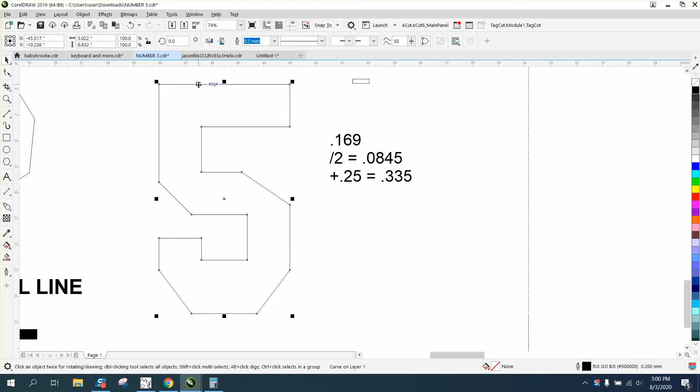and contour it .335 to the inside. That's where our tabs need to be. I would go ahead and go to there and break contour apart. We're going to need that later.

So we've got our tab, and that's going to stick to the midpoint. Now you've got your offset, duplicate offset set on, you've got it in millimeters. I've changed mine to inches, because I want that right on top of that. And then depending on how many you wanted in here, this is what's kind of neat about doing this.

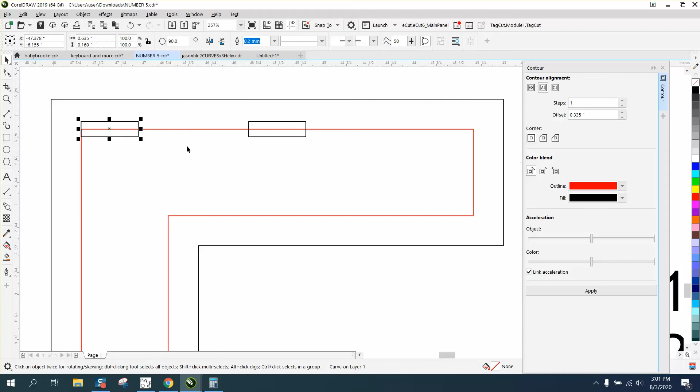Well, I'm not going to go there because you could blend this and have one right in the middle, but we're right in the middle. The question was how to get these other angles. Now we know this one is the angle it was, though I can't remember what it was from the other video.

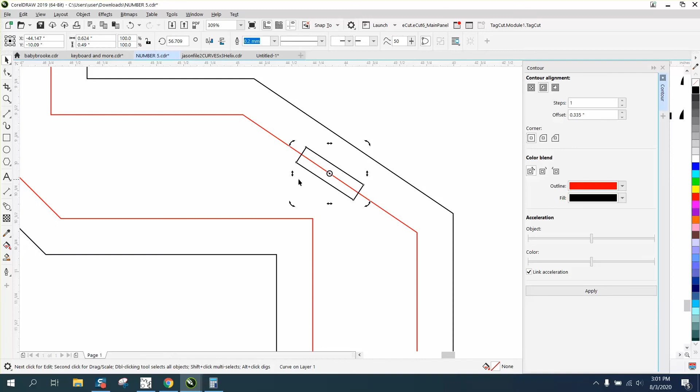But we are in the middle of the item, and we can take a rotation and hopefully just kind of ballpark it. Then if you look at it really close, if your bounding box is off—well, that is in the center. I just did this earlier.

Let's try here. We're in the middle, and you know, maybe that won't even work. But you could figure out these angles, and these angles were... let's put this back to perpendicular.

And here's a little insight: we need this thing straight up and down. So let's change it to 0, and it does it. So this thing was, what, 54.8 degrees?

So we've got that angle, and it'll snap right to that midpoint. Now let's take that one and Control D and make a duplicate. Now, I should have made a couple of duplicates, right?

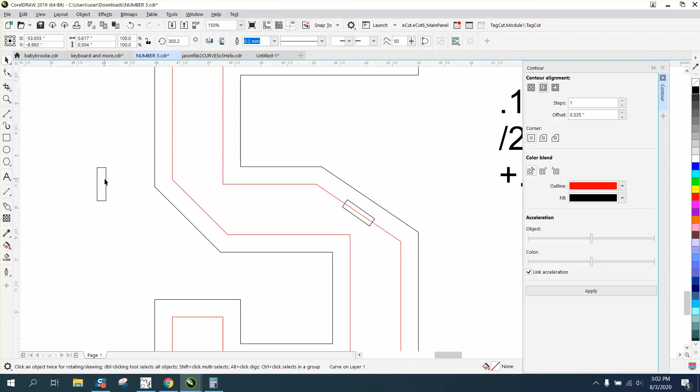Because of the fact that I messed this up, but I can go back to 0, and now I can make a couple of duplicates, and that's where your duplicate distance helps you. Control D and make a duplicate, just right on top of them.

And we could take this one and bring it into the midpoint of that line. We don't know the angle, but how close does it need to be if you can't visually see it?

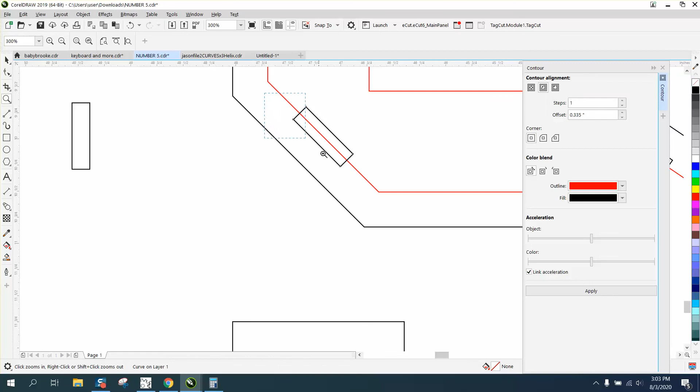Now let's grab our bounding box, and if you look, our bounding box is right on that line, so I just happened to get that right. Let's see how close I got.

Parallel dimension tool. From there, try to stay at a right angle. It's a 1/4 of an inch off, 1/4 of an inch off. So that one was easy, or I was lucky.

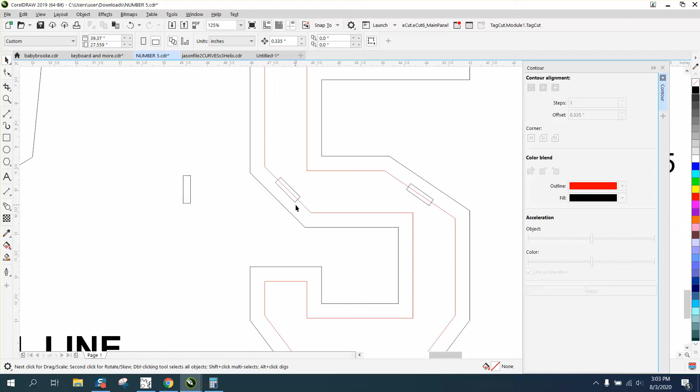And we've got one more to do that's not at any of those angles. Let's see how close we can get on this one. And see, I'm automatically going a 1/4 of an inch off.

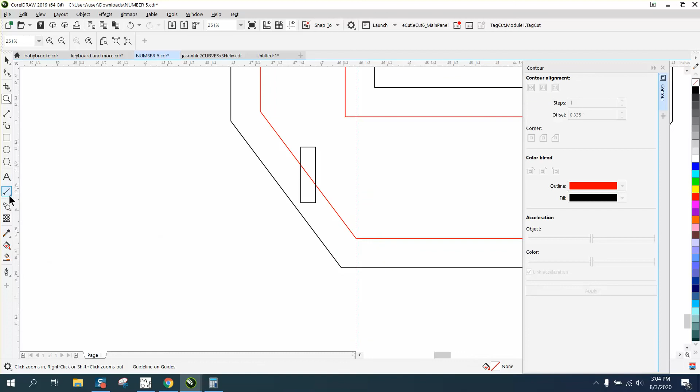I don't know of any way—I mean, you could, like we did in the first video, create an angle, have it snap to that, get your angular dimension tool, and this wouldn't take that long because you only have 4 of them to do, unless you're doing the whole alphabet or whole number system.

This is 36.87. Rotate this 36.87, and voila, you have it right in the center of your item.

So that doesn't take too long, and then just do them around, and you've got one more angle to do, and then just place your perpendicular ones.

And if you want them, like in the middle, just take this one. I'm going to leave that there. Control D and make a duplicate, and then rotate this to 0.

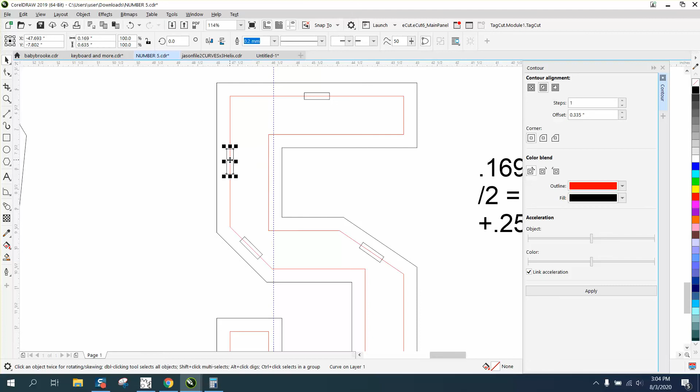And if you want one in the middle, just go down to the midpoint. And then when you take away your 5, there's your items, your tabs.